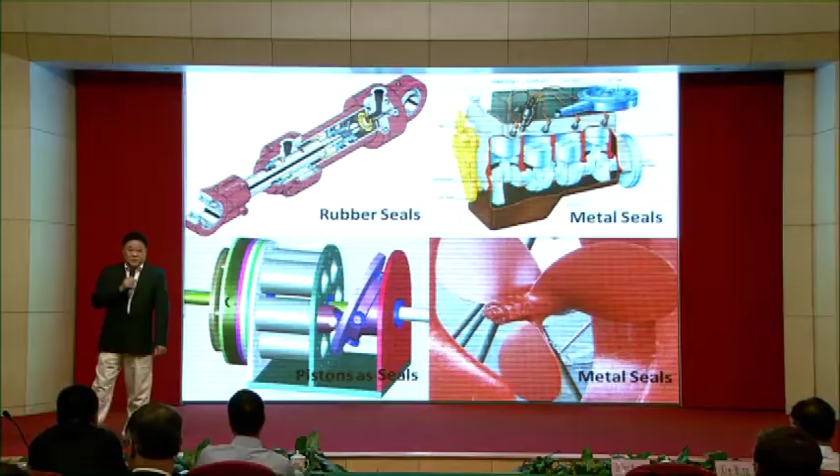Seals are everywhere and made by different materials, but they all have problems. Engine piston rings have open ends, so they must leak. The stern tube of a ship basically is only a sliding bearing. It's not really a seal, so it leaks. Rubber O-rings of hydraulic systems seal very well, but they're easily broken and eventually leak. And piston pump systems use the piston as a seal. So basically, no seal at all. Leaks everywhere. Leaks are expensive, and they cost money. They bring a lot of bad factors that couldn't be overcome.

So is it that we have no choice but to live with it? Not necessarily. Here comes our invention, this metal seal device. Not only does it save money, but it opens many opportunities. And most of all, it's patent protected.

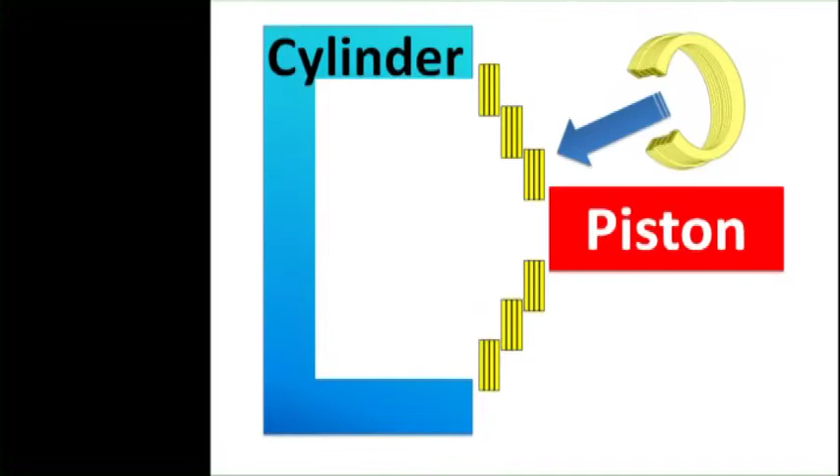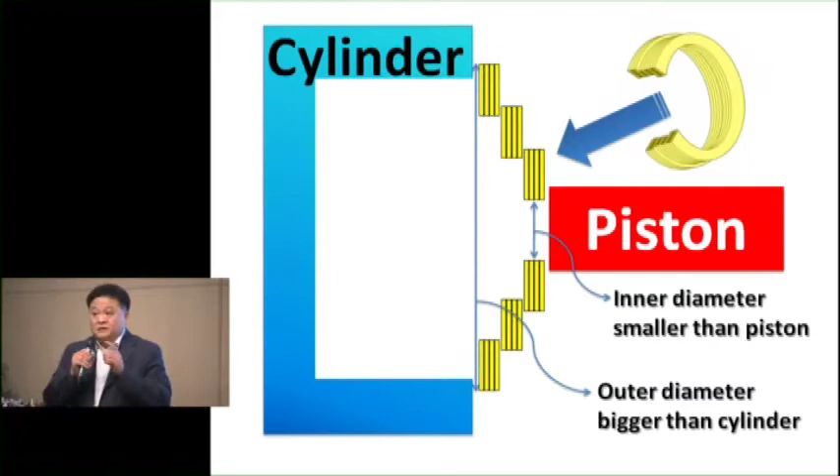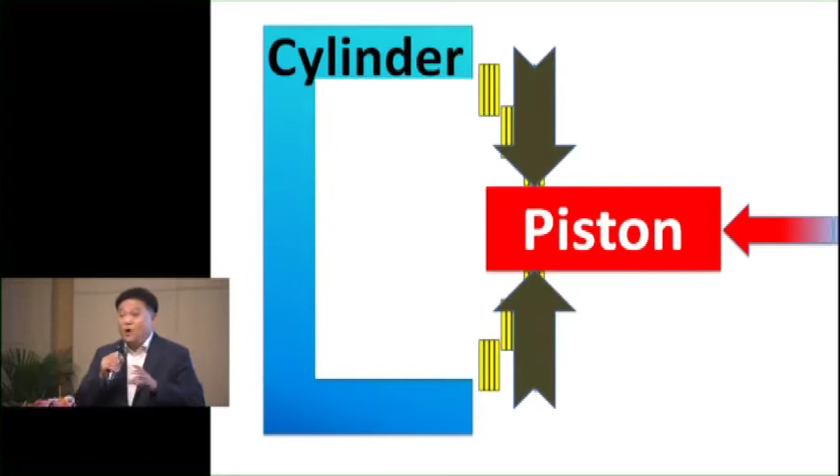Here you can see our seal, the cross-section. And from here, you can see that actually it's designed in many different sections with different diameter settings. The innermost diameter is a little bit smaller than the piston. And the outermost diameter is a little bit bigger than the cylinder. When it's installed on the piston, the piston widens the diameter. So the radial contracting tension will hold the piston all around tightly for sealing.

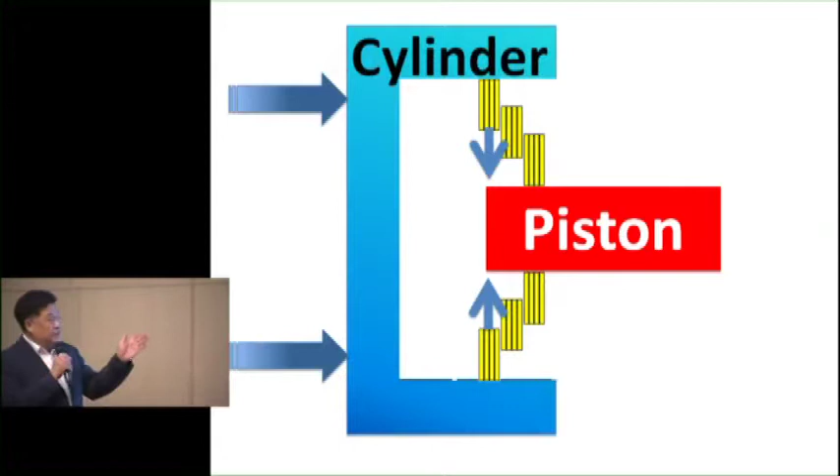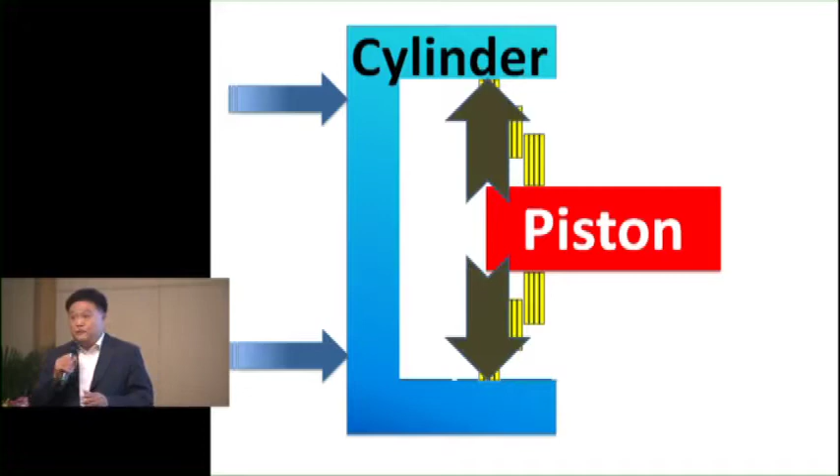And when installed in the cylinder, the same thing happens. The cylinder narrows its diameter. So the expanding radial tension will get in touch with the cylinder surface all around. So it leaves no room for leaks. The touch force actually is provided by the difference of diameters. But the diameter difference is so small, so the force applied on the sealing surface is so gentle. It's like felt. The same happens to the piston surface. So this is a very magical phenomenon that most of the frictional drag is taken away.

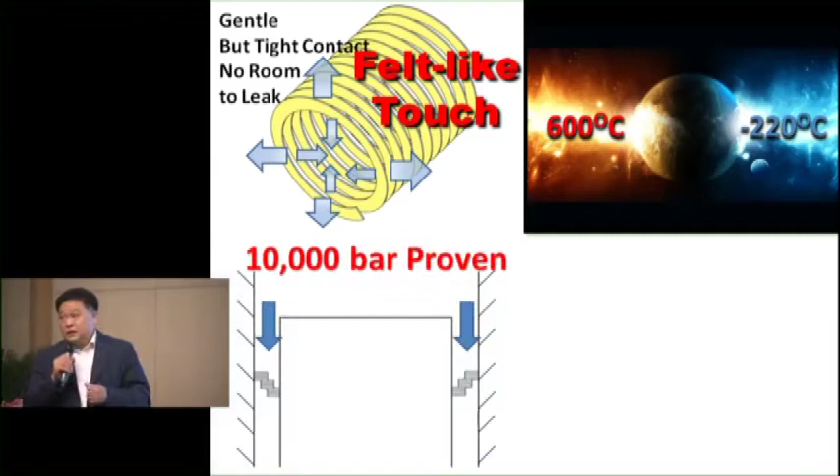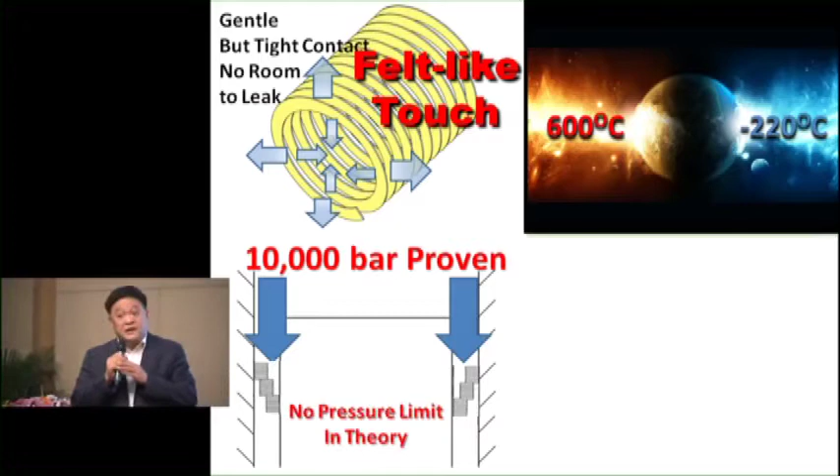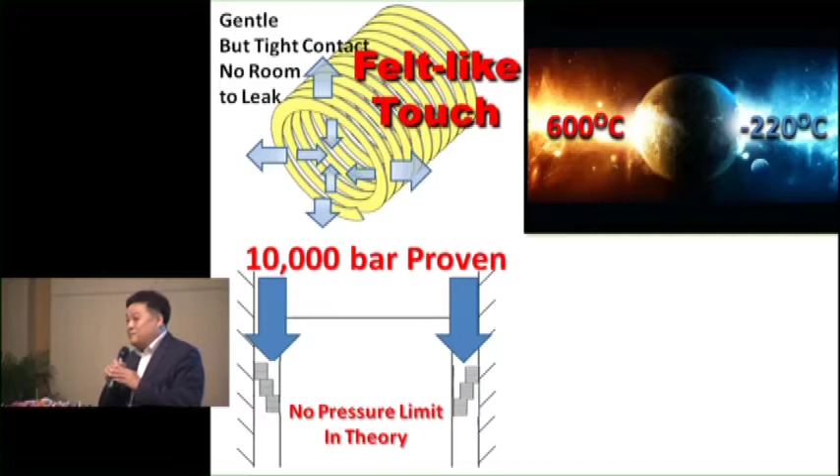This device is made of metal. It can stand extreme temperatures from 600 degrees Celsius to minus 220 degrees Celsius. And it's proven to stand high pressure up to 10,000 bar. And more pressure to deal with is actually very simple for us. We can just make it thicker with more rounds to go against the pressure. So theoretically speaking, there's no pressure limit. In this case, ultra-high pressure could be easily achieved at low cost. When plated with gold, it can even withstand boiling acid or alkaline. Amazing.

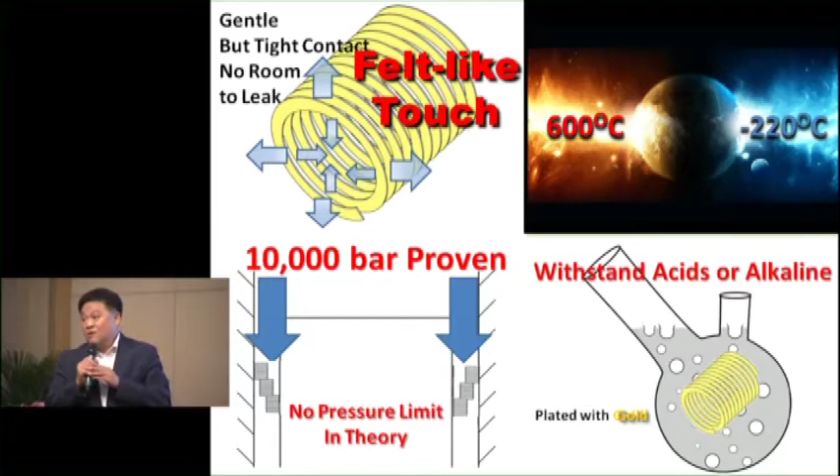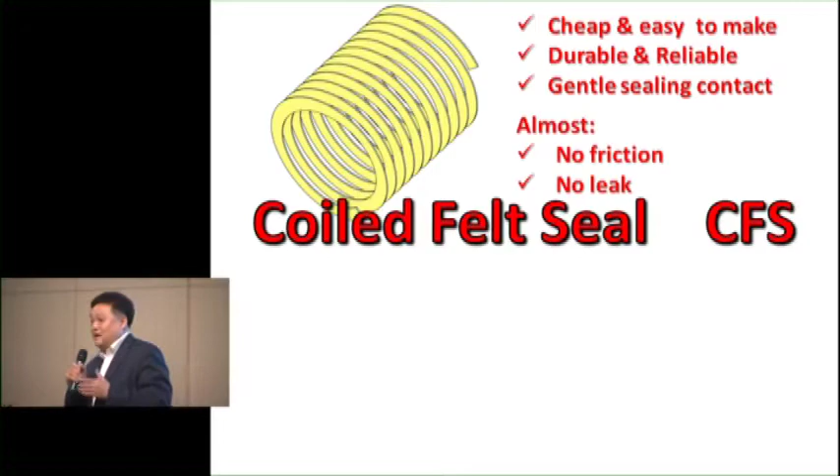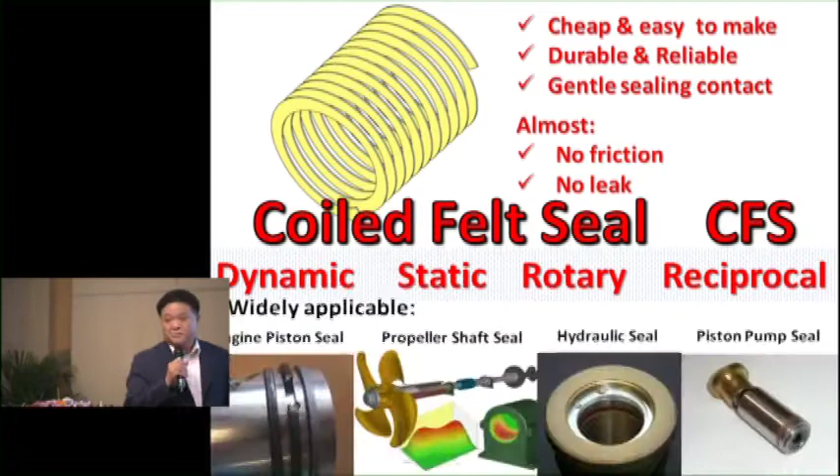With this felt-like touch property, we call this device the coiled felt seal, with the short term CFS. It has many beneficial factors on the sealing function. And very magical, it suits almost all sealing modes. And it could be widely applied to machines of various industries.

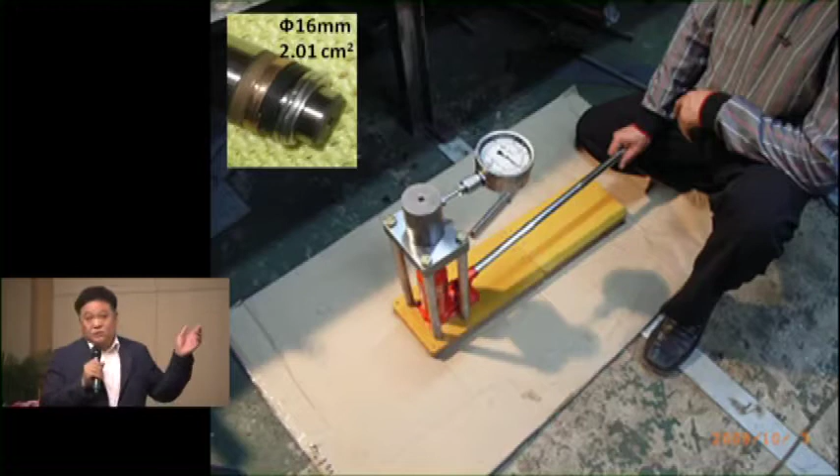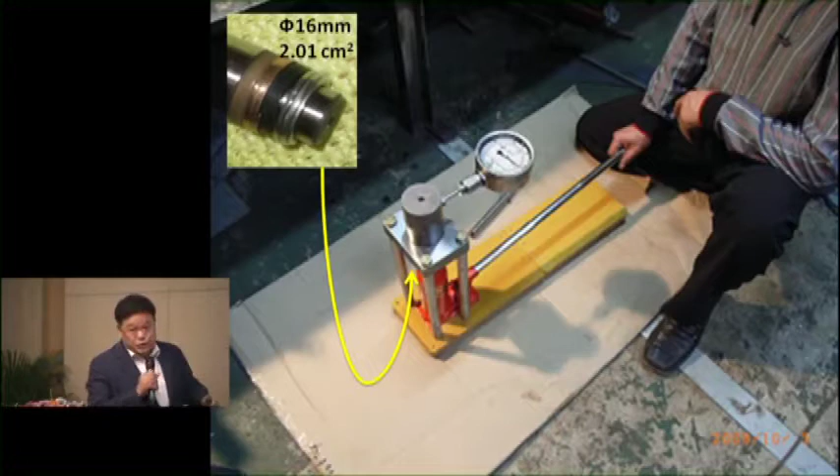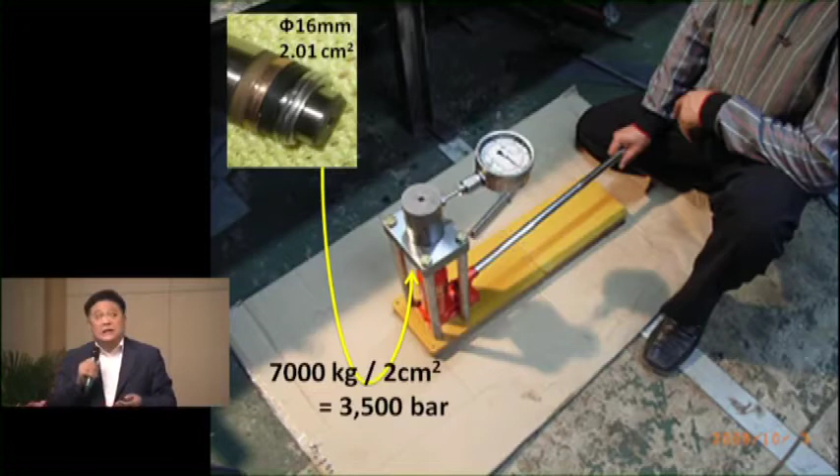Now this is a setup to show how it really seals. This is a 16 millimeter piston. We installed this seal on one end. It has a cross-section area of about 2 square centimeters. We apply the force with a 7-ton jack, and then we put the piston down into the oil tank, attached it to the gauge, and then we apply the force. And by simple calculation, we expected to generate a pressure of 3,500 bar. The result came. It's more than that.

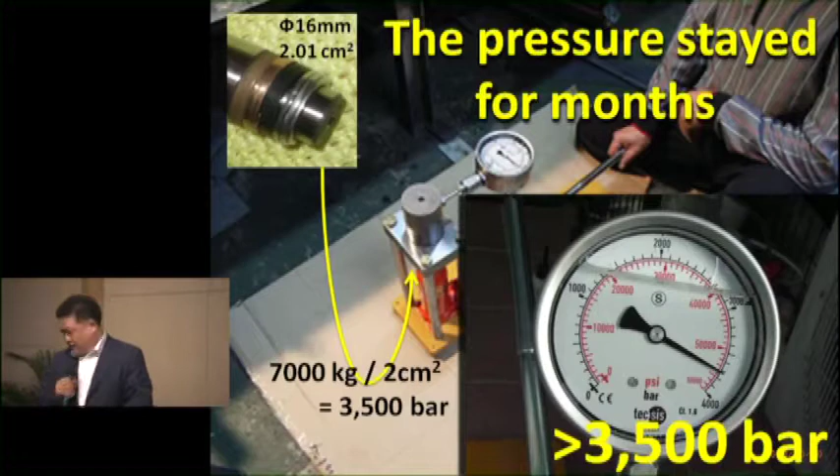Basically, this demonstration was verified by certain accredited persons: Professor Yuen from Hong Kong University of Science and Technology, Professor Li from Hong Kong Polytechnic University, and Dr. Jang, a retired dean from Manchester University in the UK.

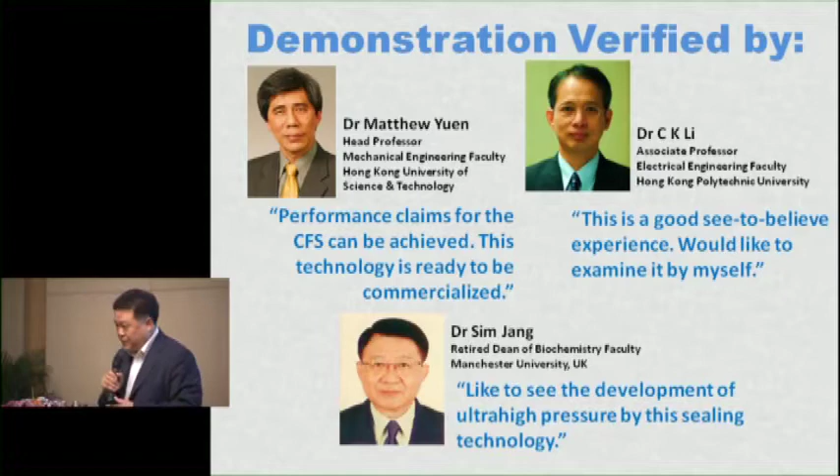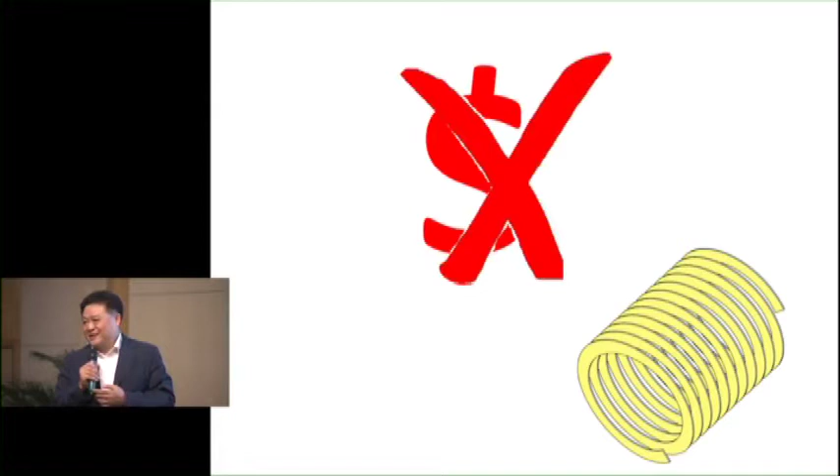How much are you willing to pay for a splendid seal like this? Sorry, we're not going to sell it, not for sale. We will never sell this CFS as a commodity because as a seal, it doesn't cost much. But the true value lies in the improvement of the machine systems.

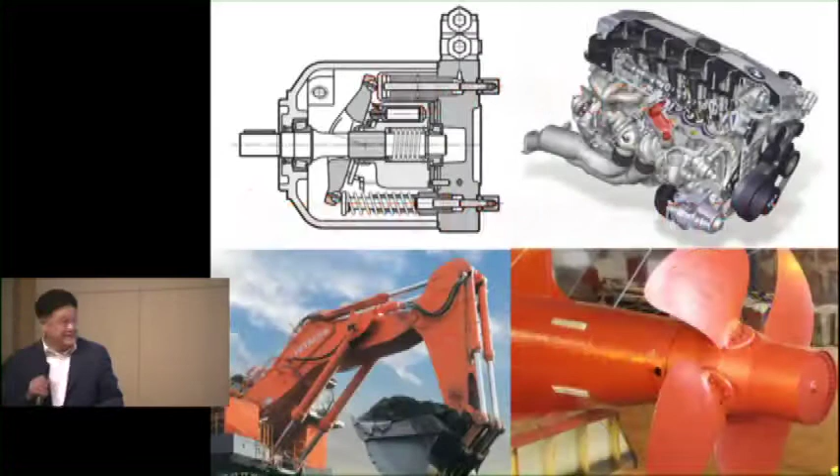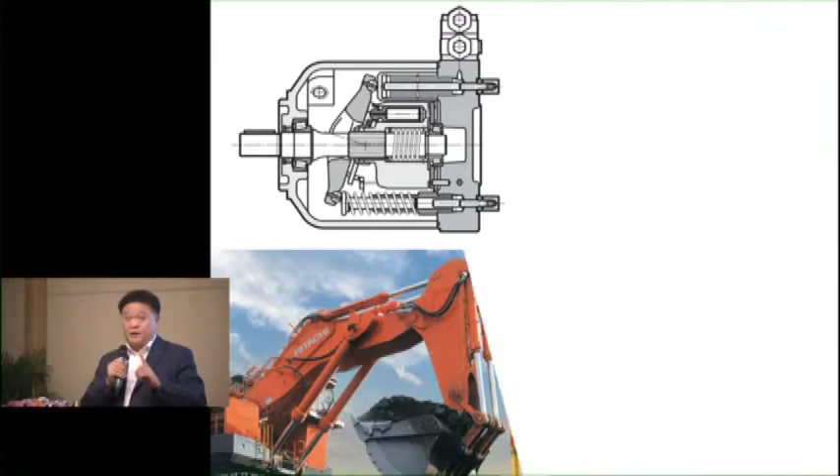Certainly, this seal technology could be applied to many different industrial machines. But we could not do everything at the same time. We could only do one thing at a time. So we decided to go the easiest way, the piston pump system.

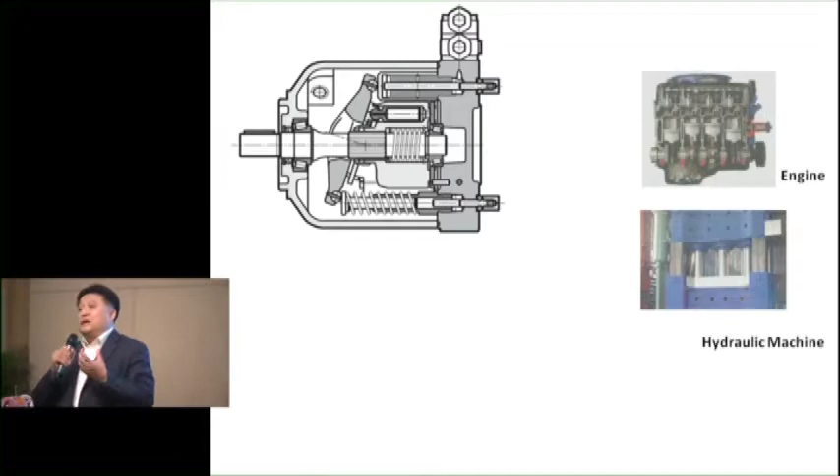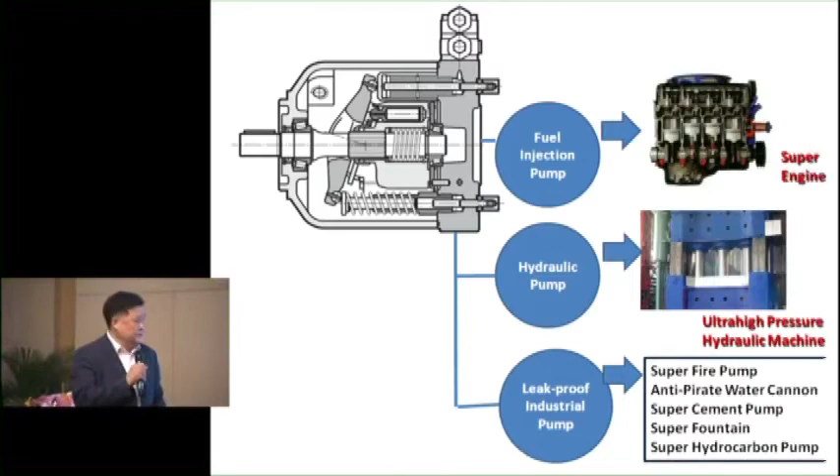Piston pump actually is a component of many important machine systems. So if we could improve the piston pump system, we improve the machines. So take a look at the current piston pump system. This is an inside view of the piston pump. The piston is moving so quickly inside the cylinder, it could not be sealed.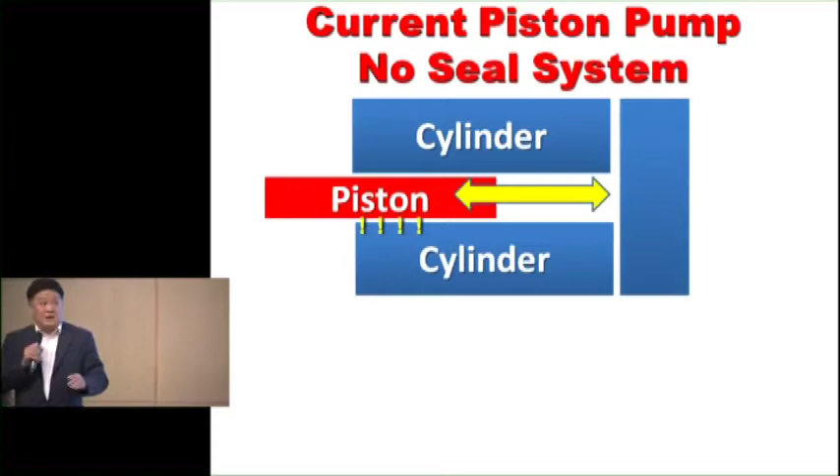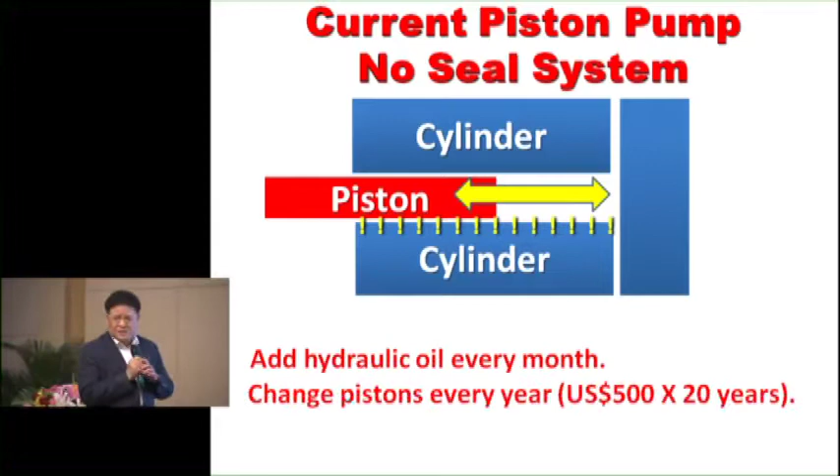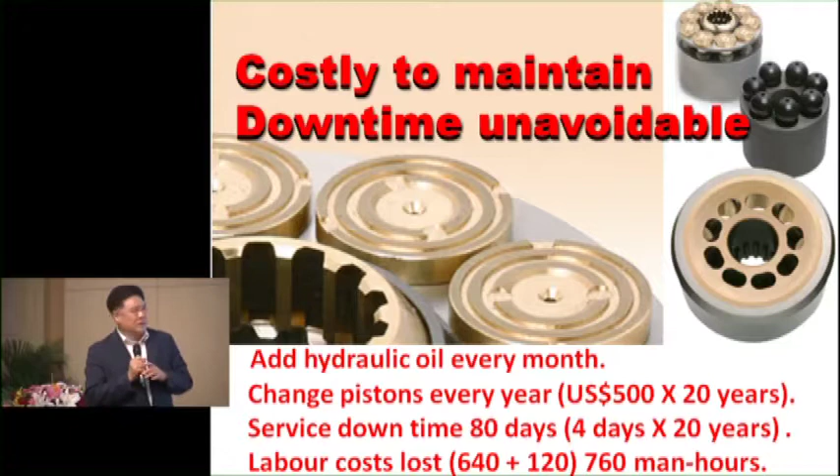And the worst thing comes. The scratch between the piston and cylinder makes the leak problem more serious. So the piston pump is an expensive machine to maintain. Downtime is unavoidable. A lot of spare parts, labor costs, you have to consider it.

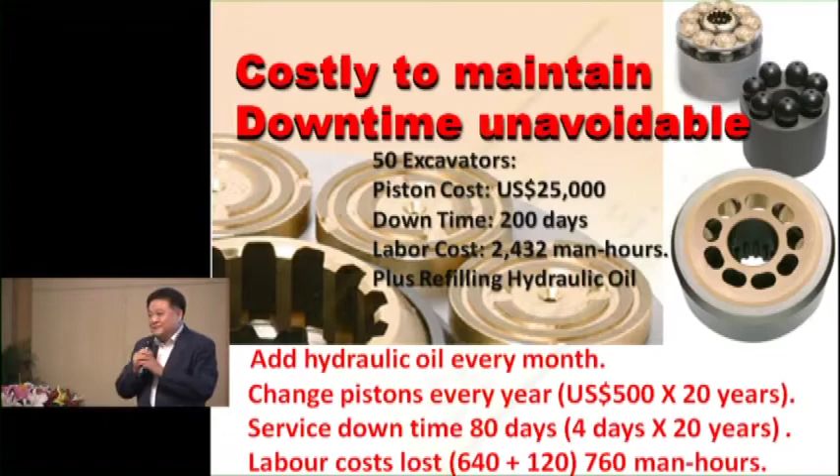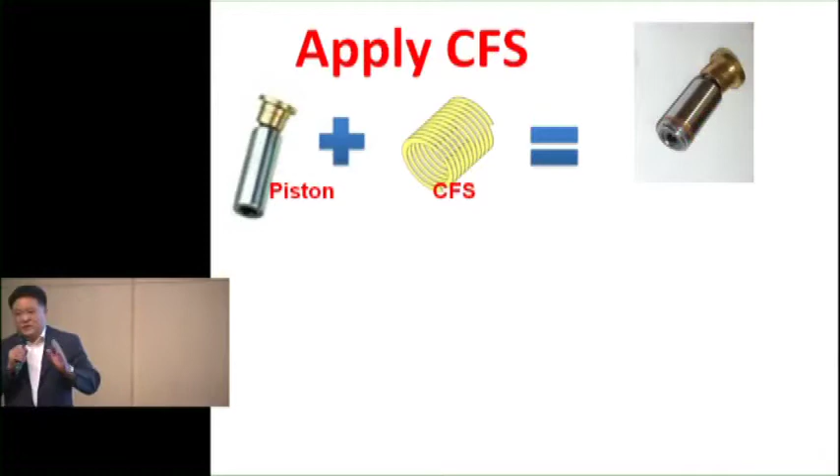So think of a contractor company who owns 50 excavators. How much cost do they have to maintain these excavators a year? I could tell you now that our technology could save it all. It's very simple and easy to apply our technology into the piston pump system. Just put our seal onto one end of the piston and put it back into the cylinder.

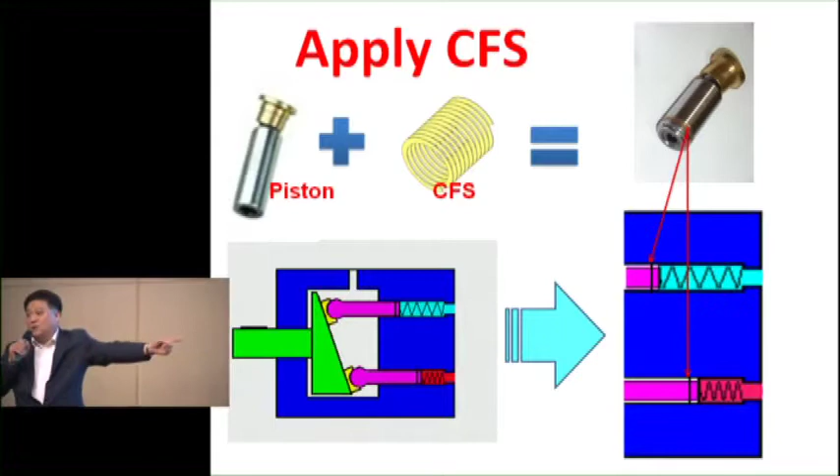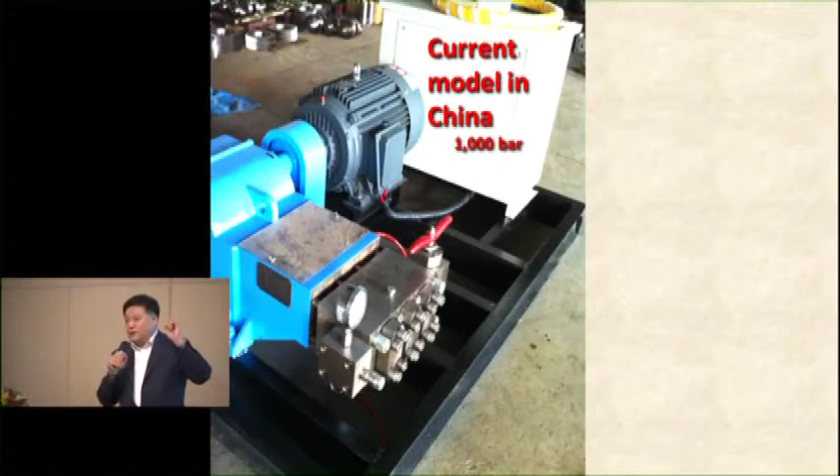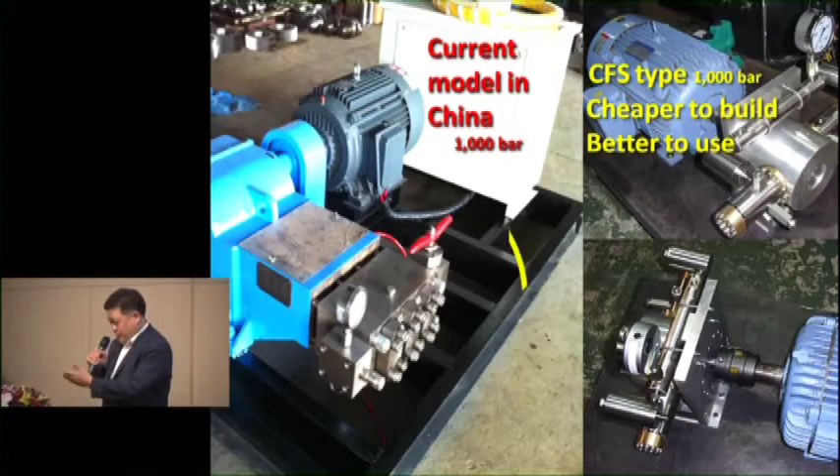So only the rim of our seal will be in touch with the cylinder. So friction will be reduced to minimal. This is the current model, 1,000 bar high pressure water jet, producing in China now. So see ours. It's simplified a lot, and take note of the difference in sizes. Just from this design, we save 30% production cost.

A piston pump is used to produce pressure, but it leaks. But our piston pump, CFS piston pump, will produce high pressure. It's very simple because we make use of the previous leak as part of the pressure. And there will be no more need to use expensive, low heat coefficient alloy to make the pistons and cylinder. So we save a lot of production costs. This principle applies to all kinds of piston pump systems.

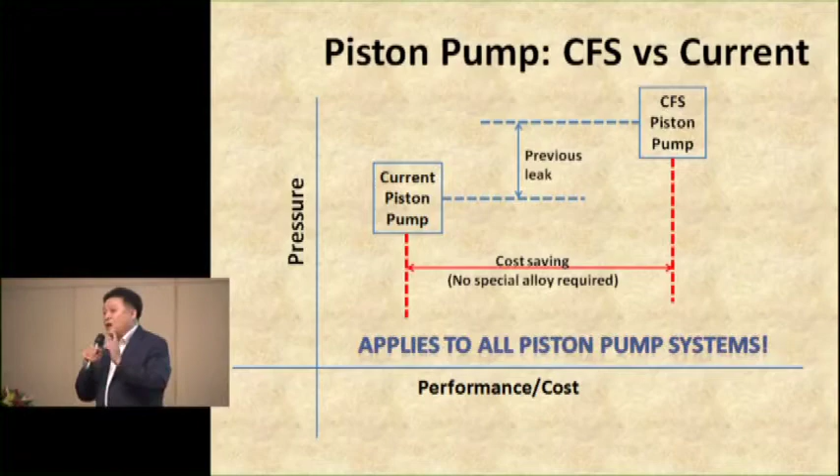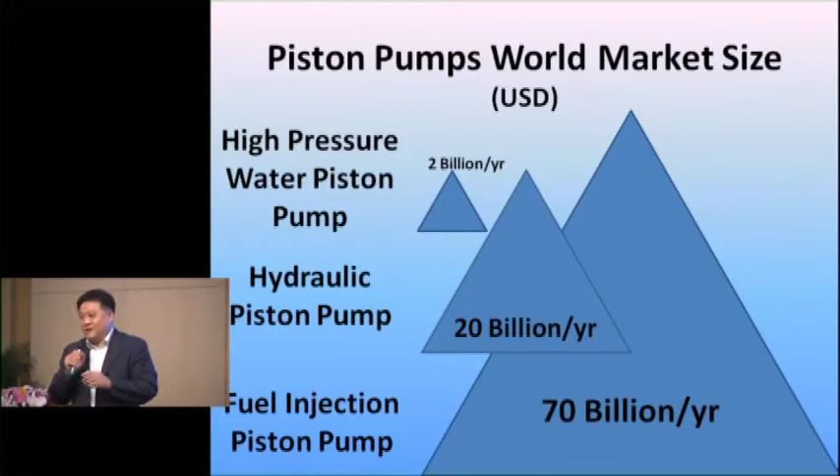In the world market, high pressure water piston pumps have a total market size of 2 billion in the whole world. But since this is a piston pump system we could improve, we could think also of the hydraulic pump, 50 million a year, 20 billion a year, and fuel injection pump, 70 billion a year. And with this system, we could provide immense water flow as well as pressure. So we could be a better firefighting pump than the centrifugal pump. So it takes a whole of more than 100 billion US dollar market size, a big opportunity.

We have finished the R&D phase. And this is the best time for investors to join us because we are about to launch our products and start our marketing phase. And then we anticipate in about 1 year's time, we will start our mass production phase.

We are in alliance with a pump factory in China, Tianjin High Pressure Piston Pump Factory. They have been in the industry for more than 20 years. They know who's who in the industry, and they have enough customer base all over China. And they can bring us industrial market access.

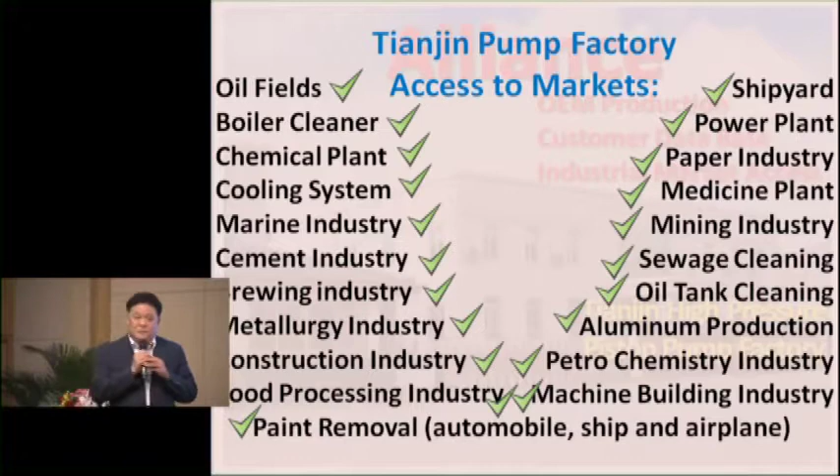And through this piston pump factory, I talked to some users of piston pumps. And I explained our innovation to them. They all got excited. They promised me they would try our pump when our pumps are ready. And if it is as good as what I told them, they will shift to use our pumps.

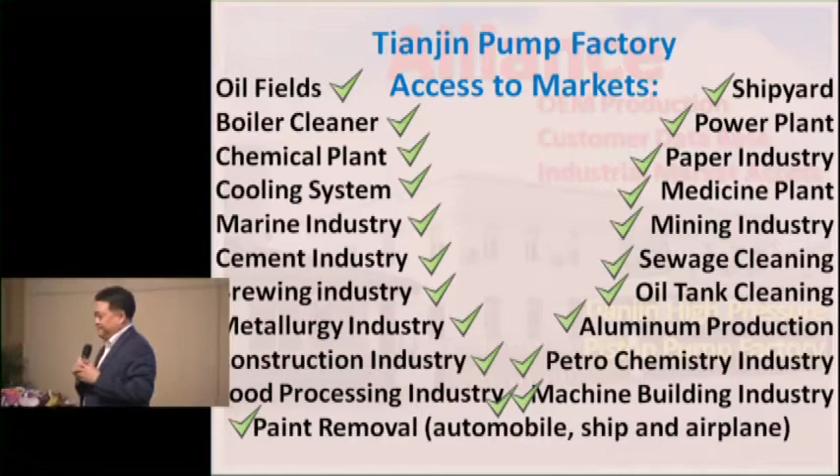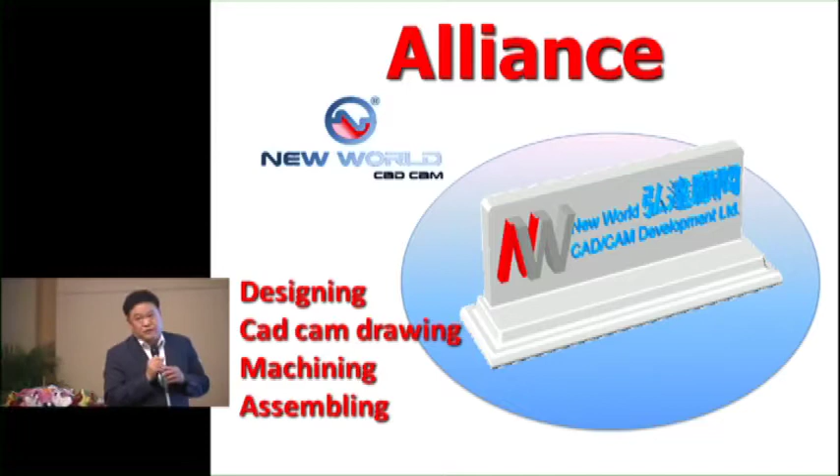Okay. Also, we have an alliance with New World CAD/CAM, a Hong Kong-based engineering company. They have their head office in Hong Kong and factory in Shenzhen. They could help us from A to Z to produce new models, from CAD/CAM drawing, machining, assembling, and testing. And we have an alliance with Sighting Corporation in the US and Chinda Trading Company in Shenzhen to do the marketing for us inside and outside of China.

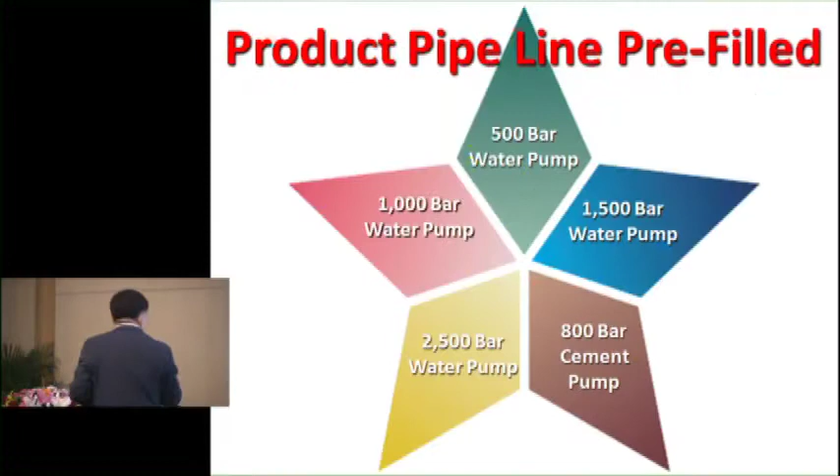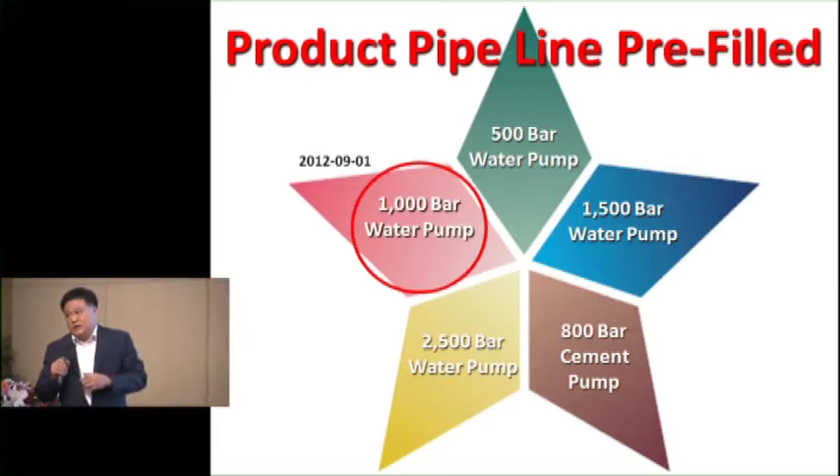We have designs of these models ready, and the 1,000 bar pump is in progress. It will be finished by the end of this summer, and at the end of the year, we'll have the other 3 models finished. And by the end of the first quarter next year, we'll have the cement pump model.

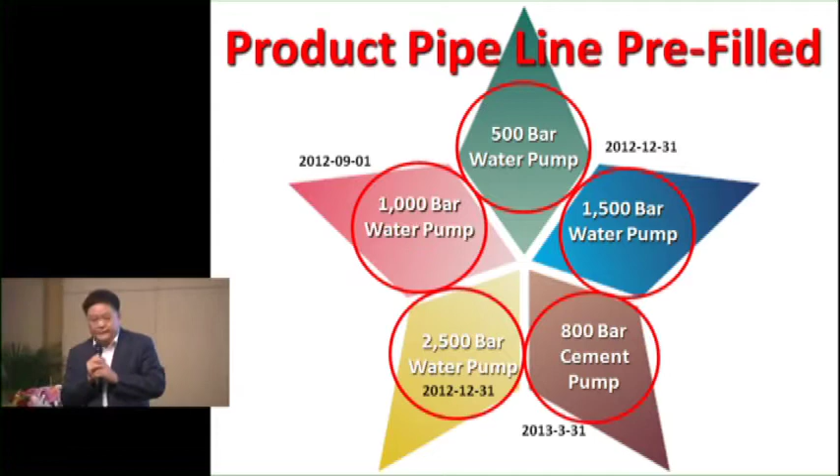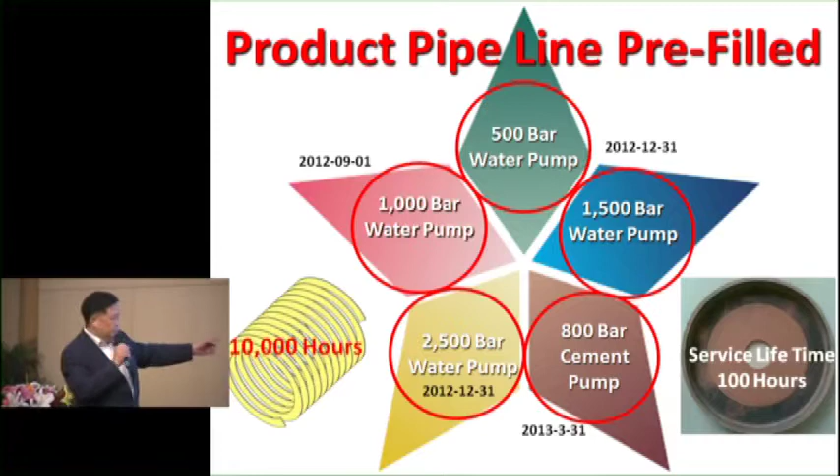About the cement pump, there's a very interesting figure that I would like to tell you. About 10 years ago, China started to produce their own cement pump. The selling price was about half of the cheapest import model from Japan. But now the price falls to about 1/3, but it's still not selling well. This is the reason. Their seal could only last for 100 hours. Think if you're a contractor, can you stand it? And we can guarantee the lifetime of CFS for 10,000 hours.

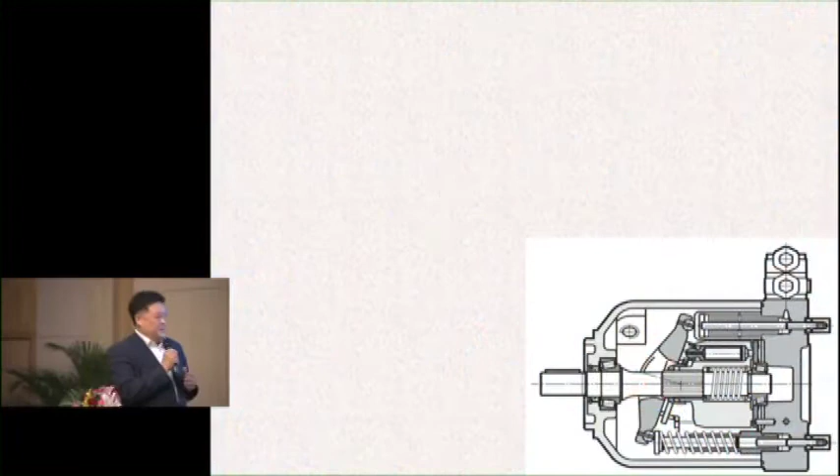When we are ready, in the future, not very long, maybe a few years later, we will start to grow into other fields of machines, one by one. And that will be the real time for us to change the world for good. And thank you for your patience.

Thank you very much for your presentation. I kind of used the razor blade analogy, where you have the razor and you're trying to create the razor blade. Or you have the blade, but you're trying to create the razor so that you can sell more of the blades. The blades? The blades, which is the CFS. Okay. Maybe this is not a good analogy, because obviously your seal technology has much more IP than a blade.

But I'm struggling to understand, is your vision and your company the seal technology company, or are you trying to be a... Actually, we are a mechanical engineering company. It's not a seal company. Seal is only a little part of our technology. It came from a series of technology. Actually, it started from an engine. And this engine technology was inspired, Moses got inspired when he was in IBM.

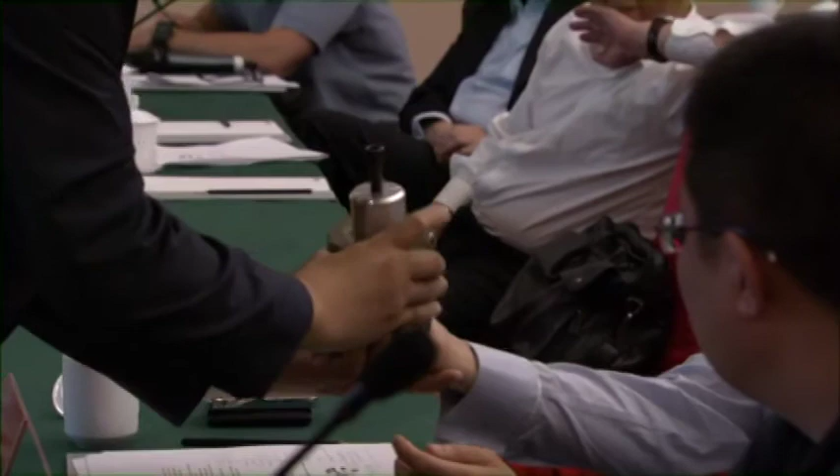And I have a real sample of the seal installed on the cylinder, so you could move the piston just by hand and feel the suction force. Maybe you could have a look at that. From here you could see the brass thing inside is the seal, and I could take it out later on. Usually in a hydraulic system, they use a series of different O-rings to perform different sealing functions. Here we use just one seal. Maybe you could lend me your palm. Now raise this up. You can see the suction force, right?

If it is a perfect vacuum inside, with a diameter like this, you only need about a kilogram force to pull it up. But on a palm it's not perfectly sealed, so it's easy to pull it up. But since this is sealed, you could feel the suction inside, right? And one thing more important is this: if it's a rubber O-ring inside, you have to have a machine to move it. You couldn't move it by bare hand. This one is not a perfect piston because I lost the better one during a car accident a couple of months ago. Because of this pitch, I immediately made another one in the shortest time without polishing, and still it worked. Maybe you could see.

After that, I'll show you some secret inside. Do we have any more questions, or I think maybe we call it. Okay, just 1 minute. I'll show them the secret that actually this seal is broken, and it still seals well.

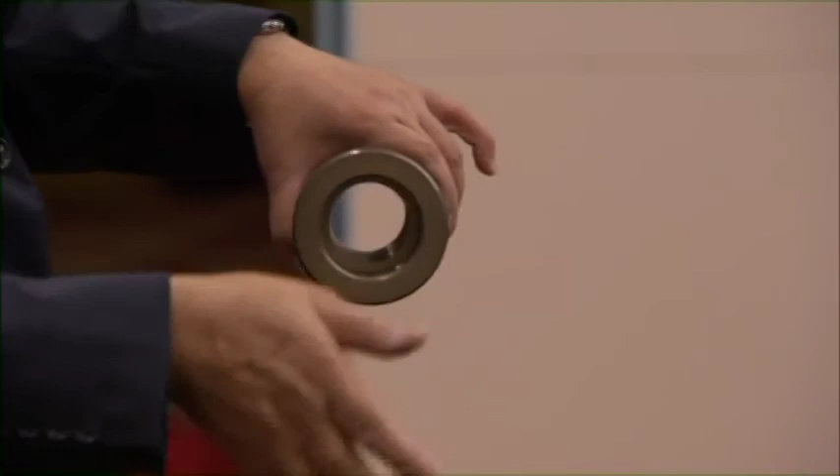And just to remind, this is a propeller shaft seal, because it's rotating and installed outside of the ship. So you could repair the propeller and the seal while it's floating, without going to a dry dock. So a lot of innovative usage. So I'm done. Sorry for the time.